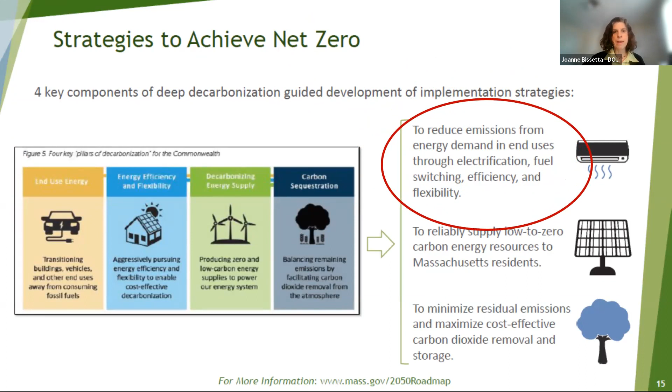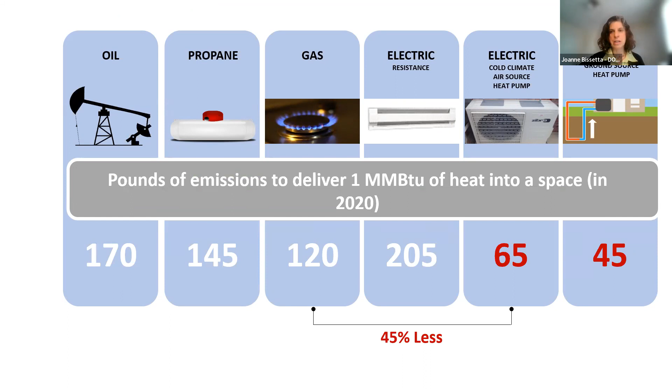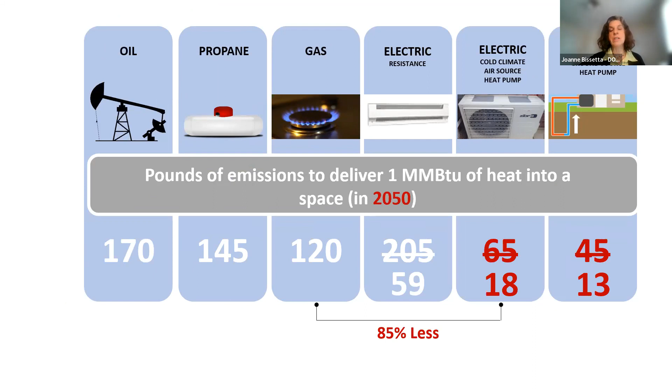So therefore, we care about building heat. This is a great slide that Paul put together a little while ago, but I still use it in a lot of my presentations - that as of today, heating a building with a heat pump has emissions that are almost 50% less than what gas has. And if you think about the grid in 2050, when all the offshore wind comes online and all the other clean energy comes online, it's going to be significantly less. So this is why the Department of Energy Resources cares about building code and how we heat our buildings.

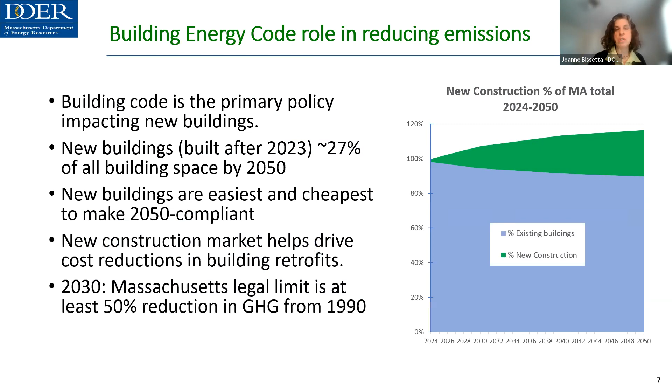Another fun fact is that by 2050, 27% of our buildings will be new - built from today to 2050. So as many of us know, it's easiest and cheaper to build efficient, net zero buildings at the outset versus retrofitting and renovating. So we're really trying to drive down the energy use by new construction, and hence having building codes that reflect that.

So we've been doing this for a while. DOER has been involved with energy efficient building codes since the Green Communities Act was passed in 2008, again really highlighting efficiency and minimizing peak demand. Also planning for future infrastructure needs by having EV ready and solar ready components in the building code, and all electric pre-wiring in the specialized code. So when the occupants of these buildings are ready to get their EV, they can charge it at their house or have the wiring ready to install the charging station. And then, finally, because Massachusetts is a home rule type of state, communities can choose to adopt these codes on their own timeline.

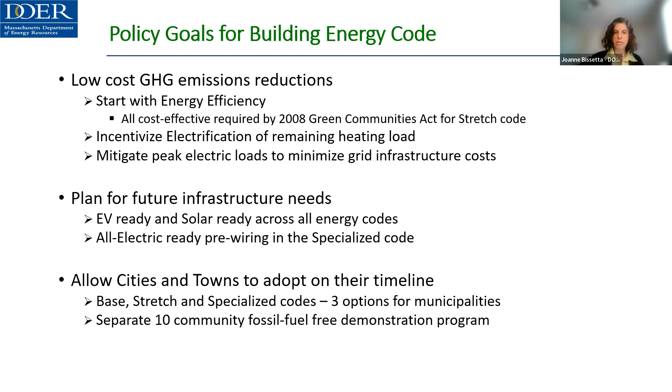All right, so as I mentioned earlier, we have 3 different codes. We have the base code, which is part of the Massachusetts Building Code. Stretch code, which most communities in Massachusetts actually follow, and then the specialized code, which is the new code that was part of the new Climate Act. With the base code, this is actually going to be updated very soon, and it's going to have an effective date this time next year.

So a little bit about the stretch code. Again, these are things that we hear throughout the years and continue to do so: it's this new and expensive and experimental type of code. No, it's been around for a while. It requires tight and unhealthy homes. It requires solar, and it requires residents to update their homes immediately, whether or not they're doing any renovations. So those are all misconceptions and misinformation. So hopefully by the end of this webinar, these will all be cleared up if you had any questions.

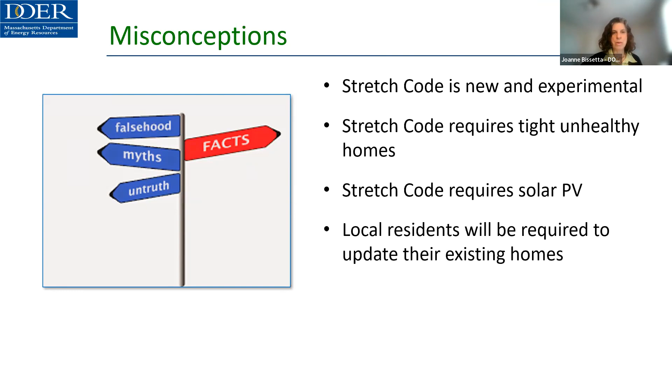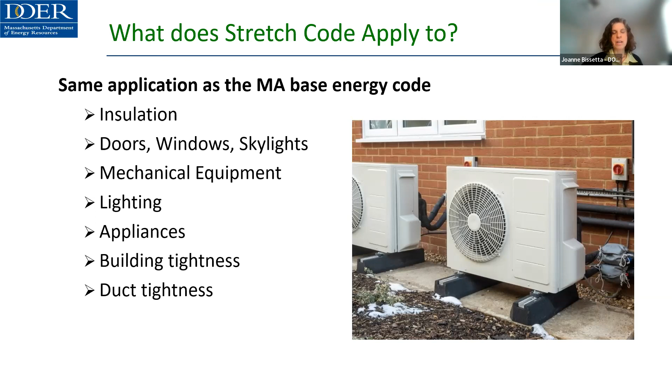The stretch code basically applies to things that the regular building code applies to, things that are part of new construction, insulation, windows, mechanical equipment, etc. It really touches the same things that the base code does. But the difference is that instead of having a prescriptive list of items and efficiencies to check off as construction is going on, it tests performance, because you can design a really good building with high insulation rates, good windows, but if it's not installed correctly, it doesn't quite work.

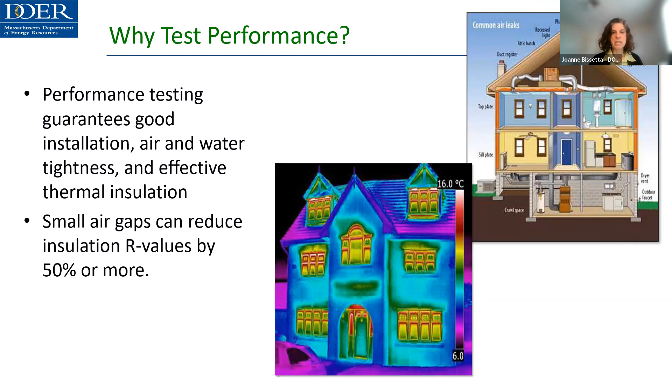So I just love this infrared picture. If you could see the green line over the front door and then the vertical lines near the windows, that shows where insulation isn't being effective. So you really want to have buildings that perform well. And how do we determine that?

Those of you that have started working in this space might have heard about HERS rating. And it's like, what is a HERS rating? It's essentially a miles per gallon rating for your home. It's an acronym for a home energy rating system. And it's been around a while. It's been part of the IECC, or International Energy Conservation Code. You may hear that more as we go on.

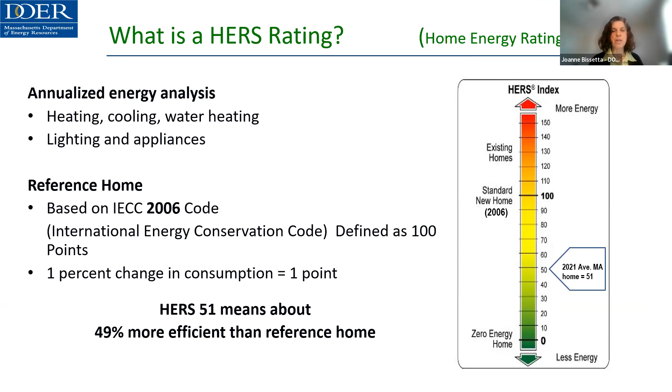The HERS 100 is based on the average home that was built in 2006. And the good news is as of 2021, the average new home had a HERS rating of 51. So a HERS 51 means that it's 49% more efficient than the average home of 2006. I live in a 100-year-old home with some windows that have been replaced, but not all. So my home might be at 120 or 130, just in terms of perspective.

And the HERS process: this is a professional that a builder will employ to help them with the design, inspection, and verification of their building, analogous to a Title V inspector or a Title V installer that a builder might hire to design and construct a septic system. So it's somebody that works with the builder to help design the building, and through computer modeling, there's a preliminary HERS score.

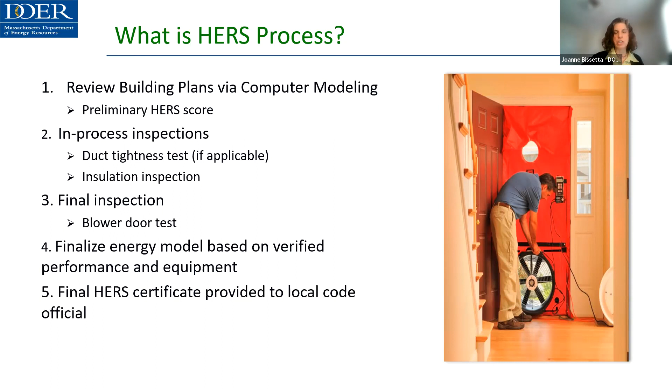And as construction is going on, they'll conduct an inspection to make sure the insulation is installed right. And then finally, they'll conduct a blower door test, which that picture shows there, which determines how leaky or not leaky the house is. And based on those results, a final HERS certificate will be issued and provided to the local code official. So that's the process for the vast majority of residential stretch code buildings.

So we've been at this for a while, and you could see the evolution here of maximum HERS ratings allowed in the Massachusetts Energy Code. We've had a bit of a hiatus since 2017, where the HERS ratings were 55 through various renditions of the building code. The codes started to change January 1st of this year, and they're going to continue to change next year. So you can see how the codes are going down a little bit. We'll talk more about that in a second.

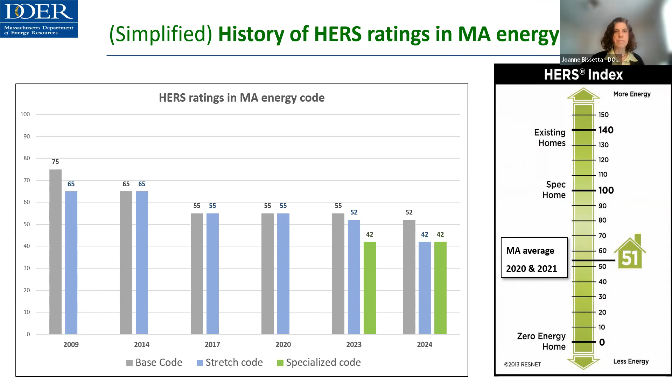So again, here's color coded. The base code is gray. The BBRS, which is the Board of Building Regulations and Standards, they're in charge, if you will, of all building codes, as well as the Energy Conservation Code portion of the base building code. They're going through the public comment process, and we anticipate the next base code to be voted on in the next few months, and there'll be a concurrency period. This is going to be the 10th edition of the building code. And we expect that as of January 1st of 2024, the 10th edition will be effective.

And again, builders building to the base code can choose a prescriptive path. That's the checklist of the efficiencies of appliances and lighting and insulation. Or they do have the option of doing a HERS rating for base energy code buildings. And those would be the equivalent of HERS 52 for a home heated with fossil fuels, 55 for an all-electric home, and 58 for a home that is both electric and has solar PV. Okay, so that's base code. 51 communities right now are under the base code.

The stretch code, we have 300 communities under the jurisdiction of the stretch code. Starting 6 weeks ago, the residential HERS changed from 55 to 52, 55, and 58. And 52, again, is for the fossil fuel fired homes, 55 for all electric, and 58 for electric plus solar. These are called low-rise residential, so anything under 4 stories. And it looks like we have the wrong sign there for 4 stories. So this would be small multifamilies, townhouses, that type of thing, as well as 1 and 2 family homes.

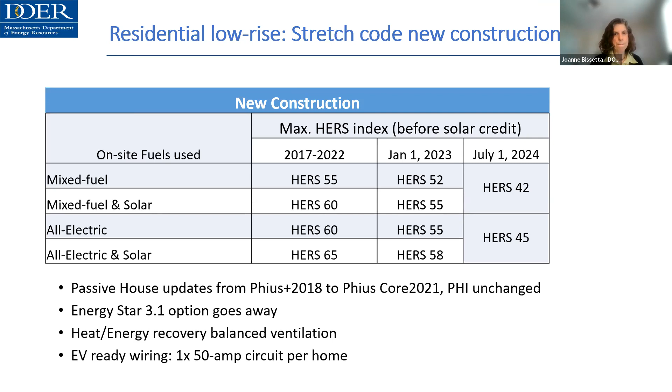So in terms of the stretch code, if you're already one of the 300 communities that are a stretch code, these are some of the key changes that happened on January 1st. The HERS ratings were lowered. Energy Star 3.1 is no longer an option under the stretch code. It's still allowed under the base code, but not the stretch code. Heat or energy recovery is now required, and the EV ready wiring is now required. And again, adding the compliance for new additions and extensive renovations.

So this is kind of a busy slide, but essentially in communities that are current stretch code and looking towards the future, the HERS 42 and HERS 45 is not that far away. So, in terms of builders looking to prepare, what our consultants have found is that it's generally cheaper to build electric homes, and Mass Save has very generous incentives and rebates available for homes that reach HERS 45 or lower.

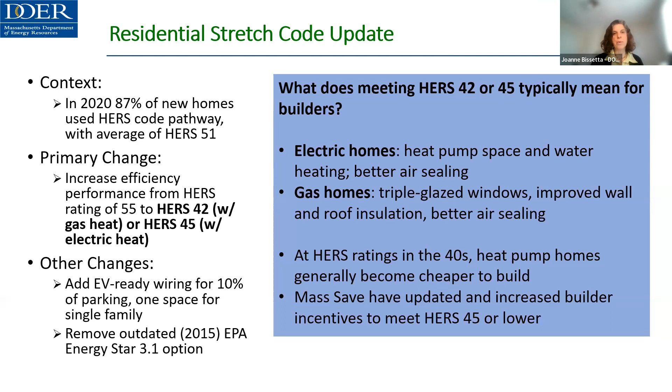Generally, from the builder's perspective, it costs about $20,000 less to build this home heated with a heat pump under stretch code at 42 than it is at base code at 52. That's primarily through the tax rebates and incentives, but also it generally costs less to build a house that only needs one HVAC system. You don't need a heating system as well as an air conditioning system. You have one, so that's less expensive to build.

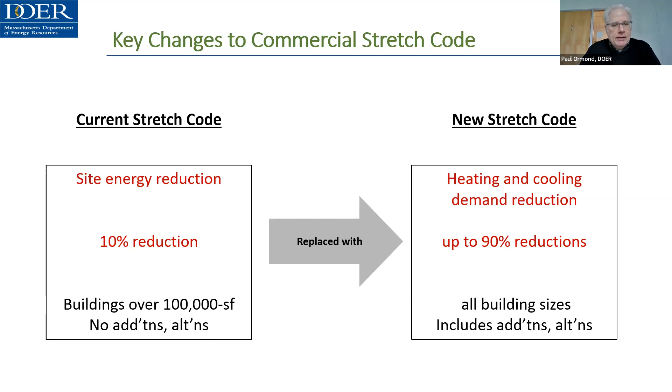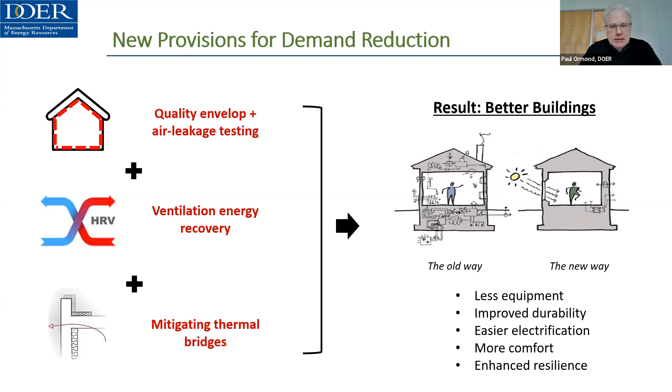All three of those things, when you combine them together at the right levels, they really deliver better buildings. So instead of having a building that has an envelope that you can't really count on, and that you have to have lots of HVAC systems to forgive all sins, you have a building that has an envelope that you can count on, and it means that your HVAC systems can be simpler, less costly, and the result is a building that is more resilient and comfortable and easier to electrify. Why don't you go to the next slide?

As I said, one of the changes is to move from a stretch code that is built on a relative performance, percent improvement, to a stretch code that makes it mandatory that you show that your heating and cooling limits are below certain thresholds. So these are those thresholds here. It's called the TEDI limits. TEDI stands for the thermal energy demand intensity. So you'll see that there's a certain level of heating limit there. The range depends on the size of your building, and there's certain levels of cooling limits.

Now we've designed this so that the design community that's used to the current stretch code can continue to use the same modeling tools that they've been using for decades. So it's not necessary for the design community to go out and learn new modeling tools or obtain new things. They can use the kind of tools that they're used to using. It's just that they're extracting different results from those same tools to show compliance. Would you go to the next slide?

So another change, as I mentioned, is that the stretch code now does apply to additions and alterations. So let me just walk through each of these rows one by one. So this is again for a commercial building: if your addition is small, so it's under 20,000 square feet, and it's also less than doubling the size of the building, then the way that you show compliance with the stretch code is you follow stretch code prescriptively. That means that you don't have to do the modeling and such. If your addition is larger than that, for a commercial building, you treat the addition like new construction. So you would have to show with modeling, et cetera, that you're meeting those TEDI limits.

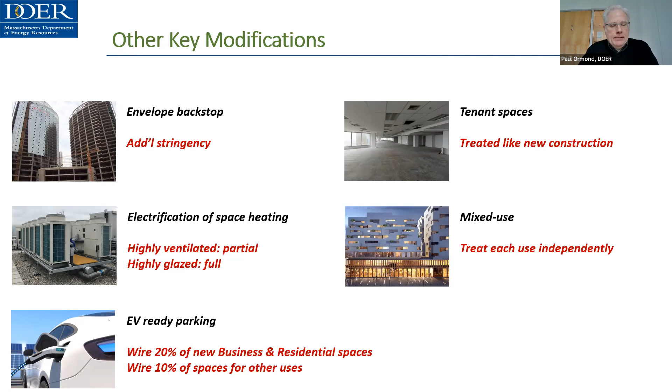So we did an extensive study to look at the way our proposed stretch code compares to the current stretch code. So this was a team led by Steven Winter Associates with Buro Happold, BR+A, New Buildings Institute, and everything was cost estimated by Consigli Construction. For those that maybe are familiar with commercial construction, you should be familiar with these team members, and I'm sure you're familiar with Consigli. They built probably billions of square feet in the New England area, so they're very experienced at cost estimating. So this team put together designs for buildings that meet the current stretch code, and then designs for a version that meets the proposed stretch code that's going into effect.

And then each of those were priced. What we found was that the proposed stretch code has a lower life cycle cost in all cases. So it is moving to a code that is more cost effective than what we have now. In general, we found it's much more cost effective to improve the envelope and count on that envelope performance, and then use that as a way to reduce HVAC systems.

We did find that for some building types the first cost actually is smaller than under the current code. That happens because once the envelope gets to a certain level of performance, you don't need such extensive HVAC to forgive all envelope sins. So it allows you to be more lean in your choice of HVAC systems, and that saves money even from day one.

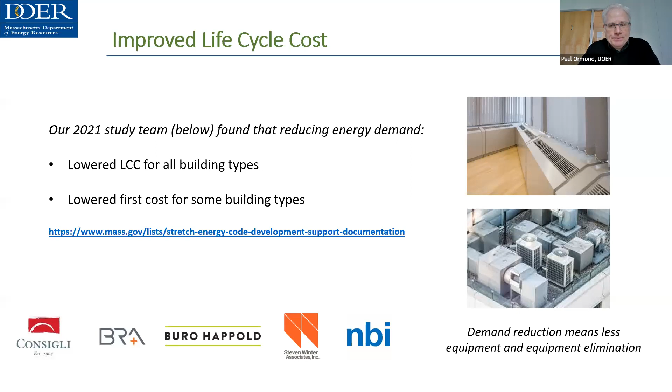One of the key statistics I wanted to present was for schools. As your municipality is considering whether to adopt the stretch code, if you're currently on base code, and want to understand where you might stand relative to the stretch code going into effect in July: for a primary school, going from the current stretch code to the future stretch code, the first cost increases between 1% and 3%, and the life cycle cost goes down between 1% and 2%. For a secondary school, it's actually a little more cost effective.

You find that with larger buildings, the cost effectiveness becomes better and better. That has to do with the massing of the building and the ability of design engineers to take advantage of the size and massing of buildings, and the better envelope you can count on. In this case, the first cost goes up by somewhere between almost negligible and a little under 1%. And again, the life cycle cost is always better, somewhere between 2% and about 3% improved.

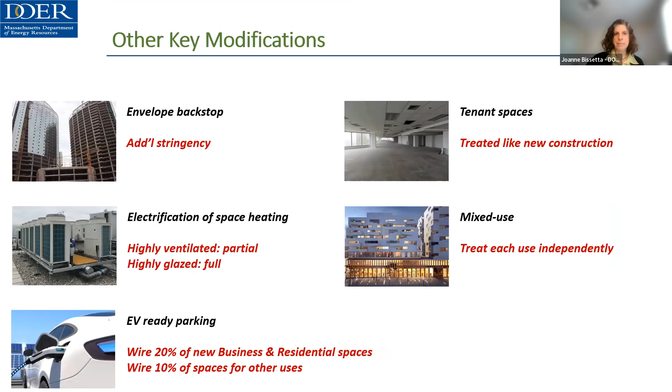Joanne, I wasn't sure if you were taking this part or not. Why don't we see what the next slide shows? Yep, no, I think this is... there we go. Sorry about that, my computer is not behaving. There we go, I can take the next few slides. Okay, so I know a lot of folks on this webinar are very interested in specialized code.

So now we're going to address some of that. It's important for folks to realize that the specialized code is on top of the stretch code, so everything in the stretch code is part of the specialized code. What the specialized code does for low-rise residential, again everything under 4 stories, is set HERS ratings of 42 and 45, versus in July 2024 when it becomes effective under the stretch code. For new homes over 4,000 square feet, it requires an all-electric or zero-energy pathway. The provisions for alterations and additions are the same as under the stretch code.

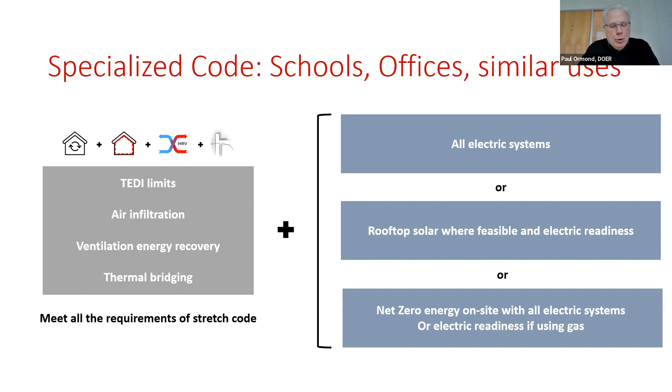This is just to illustrate, it's kind of redundant to what we've been saying. When you choose the specialized code, you get everything that's in the regular stretch code, plus what I just explained about either being all electric or being mixed fuel. I want you to go to the next slide. And right, I'll give this back to you, Joanne. This is your warrant article thing. I'll take the process. Thank you, Paul.

First of all, I don't think we explicitly said this, but if you're currently a stretch code community, you don't need to do anything. The stretch code automatically updates as we go along, so you don't need to vote on it again, assuming you want to stay a stretch code community and be a green community. Communities wishing to adopt a specialized code, the process is very similar to how you adopted the stretch code. If you're a town, you need to pass a warrant article at town meeting. We highly encourage it to be in a bylaw form, and we have model language on our website.

If you're a city or a town council government, it's that body that will vote on that. Again, we highly encourage an effective date of either January 1st or July 1st. That tends to be when code officials and builders and others look to see code changes. And again, we highly recommend that you have 6 to 12 months after adoption for it to become effective. Communities that are looking to have votes this spring, please contact your Green Communities Regional Coordinator. We can schedule a public information session to go over all this and come to your town or virtually to answer any questions, just to make sure people know what they're voting on.

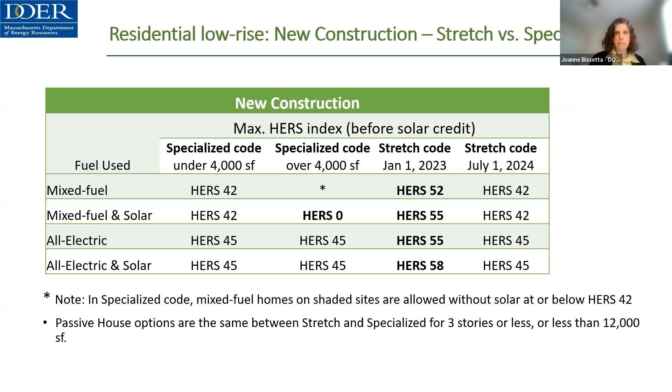So there are specific rules, let's see if I could pull it up quickly. We should answer this question like, here's the answer for residential and here's the answer for commercial. You mentioned it on the commercial side.

Additions have to be either doubling, 100% doubling the conditioned floor area -- that's what CFA stands for -- or 1,000 square feet. That's an addition. An alteration has to be over 1,000 square feet and 50% of the floor area. So, using an example, we recently did some renovations in my house. We took a wall down.

We're 1,700 square feet, but the affected area was like 300 square feet. So our kitchen project would not trigger a HERS rating. This is more for really triggering gut renovations or huge changes in the structure or a huge addition. Yeah, these levels here of the 1,000 square feet, et cetera.

These are designed to catch the builders that buy an old Cape in Winchester, and then they demolish all but one little part of the thing, and they build basically a whole new house and declare that that's an alteration because they didn't demolish the basement or something. So this is meant to capture those kind of flipping builders that are trying to basically pass off what is really new construction as alterations or additions.

Joanne, since your slides are still up, if you want to go to your resource page. There's a lot of questions, I think, both about training, inspectional services departments, and who's doing the trainings and when that's happening. So maybe we could just go through.

And then there are also energy code trainings happening through Mass Save. Additionally through MAPC, we have a couple webinars coming up. We have Codes for Climate session number 2, which is more on Mass Save electrification incentives, on March 1st. Then on March 7th, we have a webinar on healthy homes, tackling the housing and climate crisis. I'll put them all in there, plus a couple other webinars.

In terms of policy adoption questions, if you're a municipality, whether staff, committee, or board, looking to adopt the specialized code, particularly for spring meeting or in the near future, please reach out to your Green Communities regional coordinator. They'll be the best person to work with and walk through those specific adoption questions, and things like how to communicate with municipalities when they might be nervous about the stretch code, or just stretch code basics.